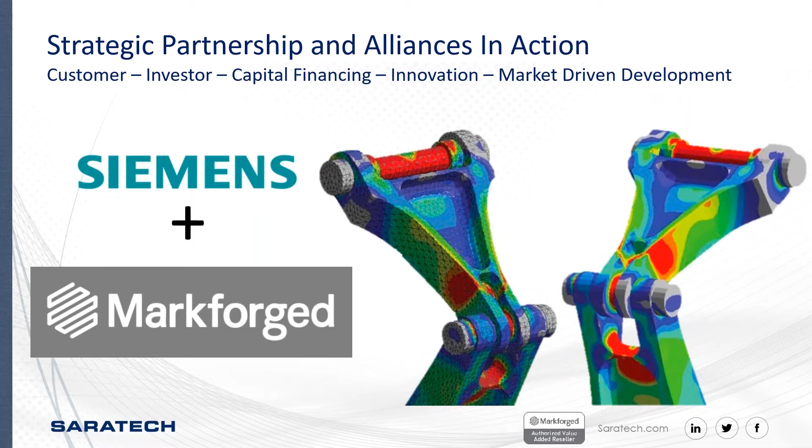So speaking of manufacturing, we are all here today for the same reason, right? To stay current about advances in technology that can make us more efficient, make our jobs easier, or provide a competitive advantage in a tough market. Manufacturing is at its core fueled by a drive for greater and greater efficiency, and it never stops changing. It's what keeps our lives interesting, but also makes it a challenge to stay competitive, and we all know that in this climate. Sometimes these changes produce incremental results. Think about increases in electric motor efficiency or sensor accuracy. But on occasion, technologies produce massive waves throughout the manufacturing landscape and fundamentally change things.

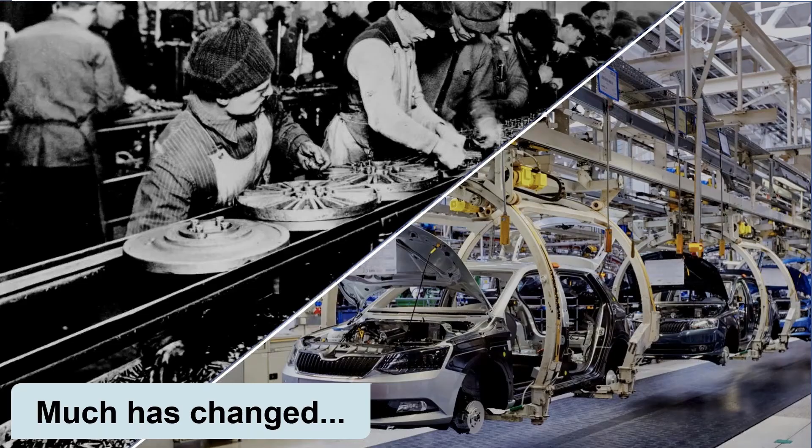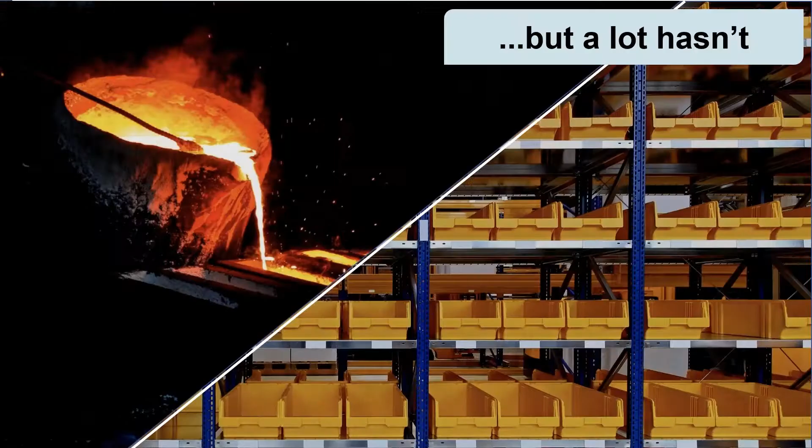So manufacturing technology has changed by leaps and bounds in the last 100, even the last 50 years. We've gone from the assembly line to lean production cells, from hand tools to CNC machine centers, and we're currently figuring out where and how automation fits in the mix. We've come a long way in the last century. But at the same time, there's a lot that hasn't changed either, right?

So we still cast metal into molds to avoid manufacturing downtime. We still have to carry extensive back libraries of tooling and replacement parts. Minimum order quantities are still high, and lead times are long, especially on low volume parts like tooling and fixtures. Tried and true manufacturing methods are reliable, but they're holding us back from greater gains in speed and efficiency.

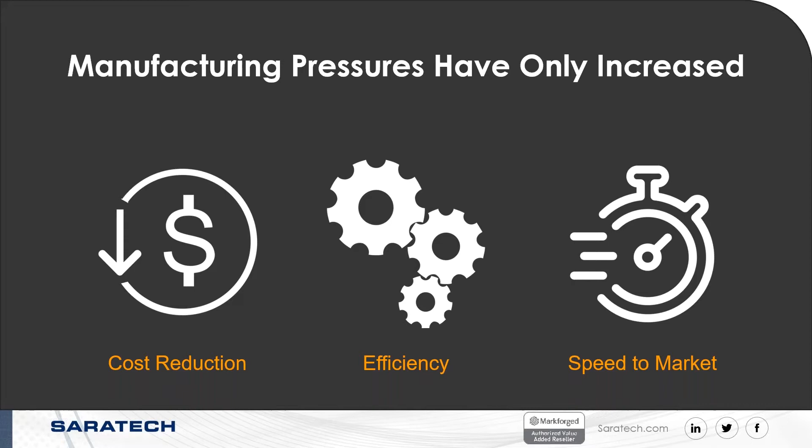One thing that's always changing are the pressures manufacturers are under to deliver. As technology improves, so do the demands of internal and external customers, leading to ever-decreasing cost goals, right? Every company is looking to cut costs and improve efficiency. And you always want to move faster and faster in bringing new products to market.

Despite 100 years of technological development, time to market is no faster for Tesla than it was for Ford. Just think about that for a second. It's been 100 years, and it still takes 5 years to build and ship a car.

Why is that? Well, first of all, cars are complicated. They're made up of thousands of parts. There's a lot of things involved in building and manufacturing a car. But our approach to producing parts hasn't changed much. There's a saying: the more things change, the more they stay the same.

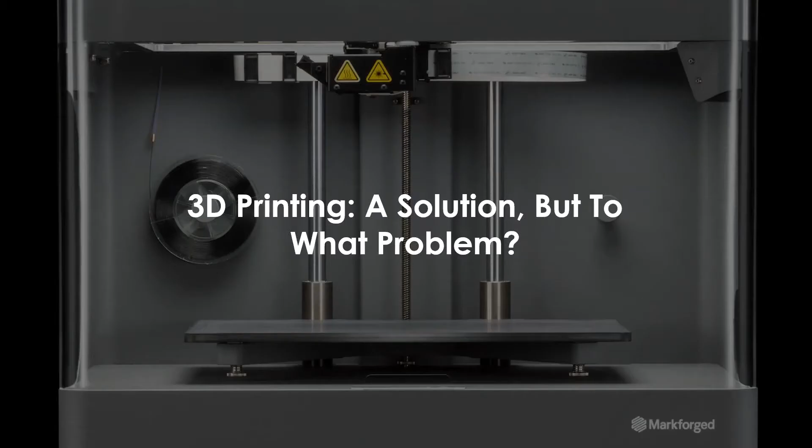But with so much technology out there, it's difficult to figure out what's right to do. What is the right technology for your business? Which brings us to the new technology we came here today to talk about: 3D printing.

There's been a lot of hype around 3D printing in the last decade, generally focused on using 3D printers in such a wide range of applications that it's become tough as a manufacturer to know where to start. Hopefully this webinar will help you toward that. What's worse, much of the hype for 3D printing has focused on pipe dream applications that are in no way achievable in the next few years.

While it's important to be aware of future technology, you're here today to learn about how you can make an impact on your business now, today. We're going to make it easy to start your journey with 3D printing and show you some of the most high impact applications to focus on when you're evaluating 3D printing for your work.

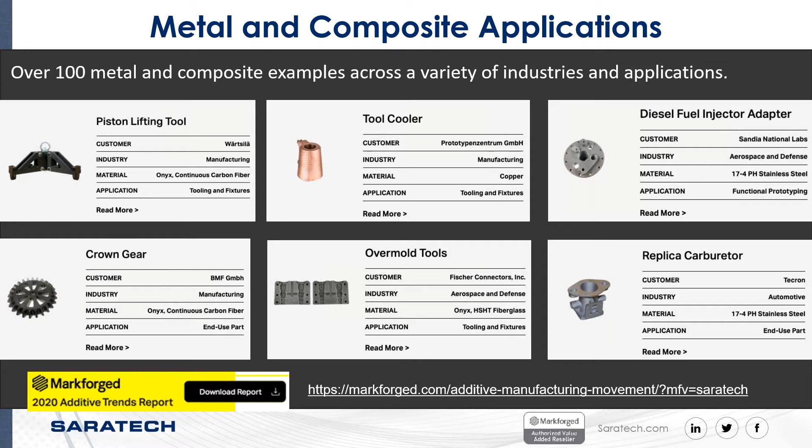We have really looked at hundreds of 3D printing cases, and it's clear that there's a strong movement towards additive manufacturing. Markforged has put together a report of these use cases. You can download them through our GoToMeeting or through a webinar following this presentation. Read the report and meet the manufacturers capitalizing on 3D printing to find out how and why companies are using this in their workflow. From automotive to aerospace to electronics to manufacturing, these modern manufacturers are already part of the movement. Each of these practical 3D applications from Markforged customers, and Saratech can help you through any hurdles with design, applications, and engineering of these product lines.

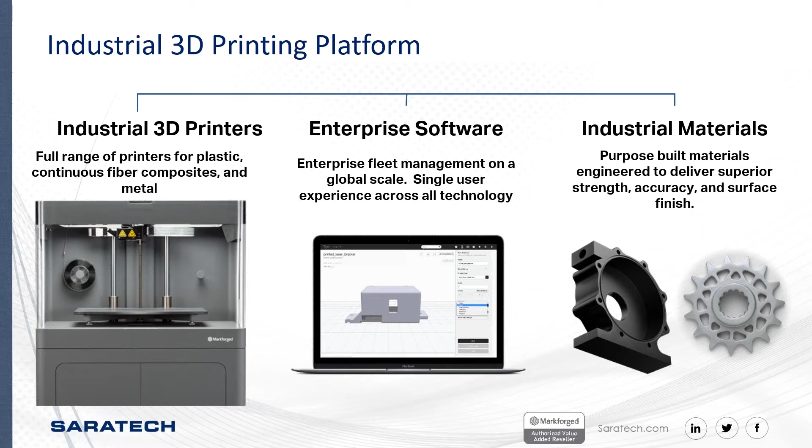Another very unique thing about Markforged is that it's one of the only companies that offers a full platform for 3D printing. What does that mean? They have various machines that we'll talk about today that allow you to print unique plastics, plastics with fiber, and metal parts. They also have an enterprise software tool that comes with the package, allowing you to be successful in placing, automating, or optimizing the print direction, print speeds, and the design that's put into this. Finally, Markforged has a list of variable materials along with fibers that can be filled through chopped form or continuous fiber, and we're going to show some of those examples as well. So it's really a one-stop shop in printing.

When we talk about a complete solution with the Markforged technology, you basically need to start with a design. You need to start with some sort of CAD file. You'll be able to upload that into their patented software called Eiger. It ties the hardware, your designs, into the ecosystem and directly communicates with the machine to allow it to

print using slicing and different configurations. Security is a top priority for Markforged, so there is only one 3D company that has achieved ISO 27001 certification, and that is Markforged. Eiger, again, is a software that allows you to upload the file, configure it, slice it, place it on the build platform, and send it to the Markforged printer.

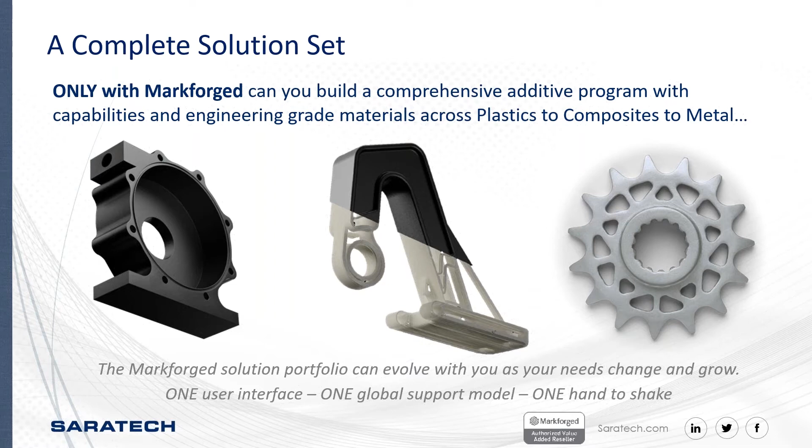One of the things that excites me is what I'll simply refer to as a hybrid product development process. As an engineer, we see a lot of tools that have always been made out of cast parts or iron or steel, very reasonably, because that's what they needed historically due to thermal temperatures or wear and tear. But what we've been successful with is a hybrid mix of polymers with or without fibers, then using inserts or a secondary metal or even polymer to interface with the gripping of a part, wear and tear on a machine, etc.

Some of the plastics that Markforged supports include Onyx, which is a blend of nylon and chopped fibers — could be carbon, could be other fibers. They have a nylon, and finally they have some vehicle and interior polymers on the Onyx side that help with UV and other environmental conditions.

On the fiber side, carbon fiber is available. Kevlar is also a very popular choice. On the lower cost scale, fiberglass and high strength fiberglass offer a lot of economical value to your printing process.

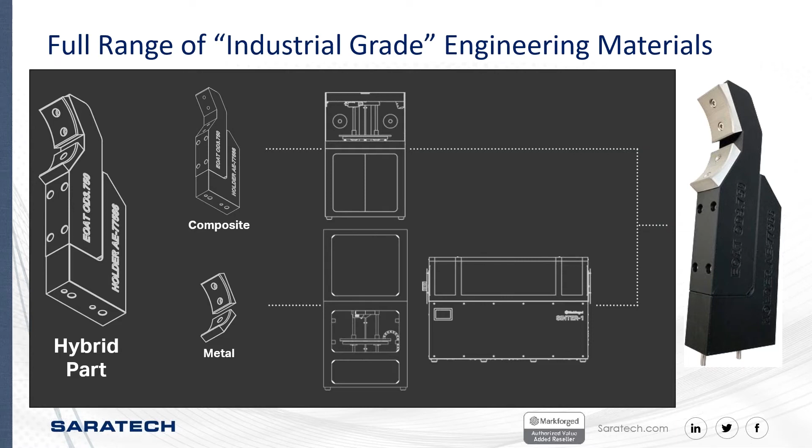In case you're not familiar with the Markforged composite printing process, basically we're using a continuous filament fabrication process to lay down continuous strands of fiber throughout the part. This gives you high strength composite effects once it's mixed with the Onyx, and allows you to achieve material properties through stress, strain, and ultimate values on the level of aluminum 6061.

To take advantage of this process, you'll still want to design your part in CAD using traditional methods. You can use topology optimization, and you should absolutely look at part reduction capabilities. So you don't want to just print the part that you've always constructed. Let's, if possible, look at the design process and use some new, modern benefits that help you and your company.

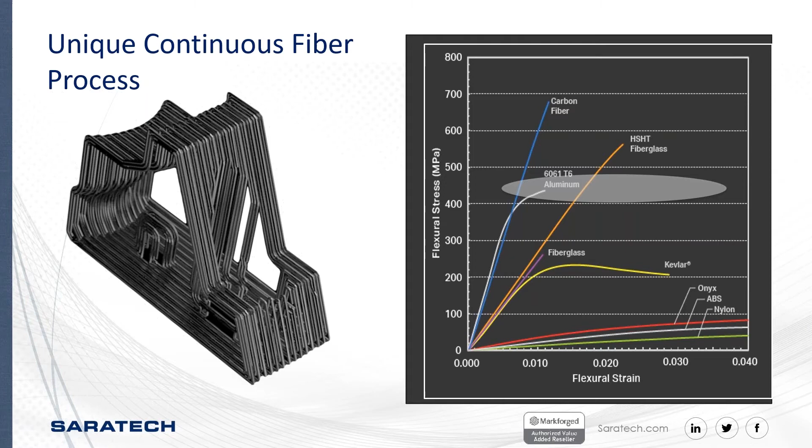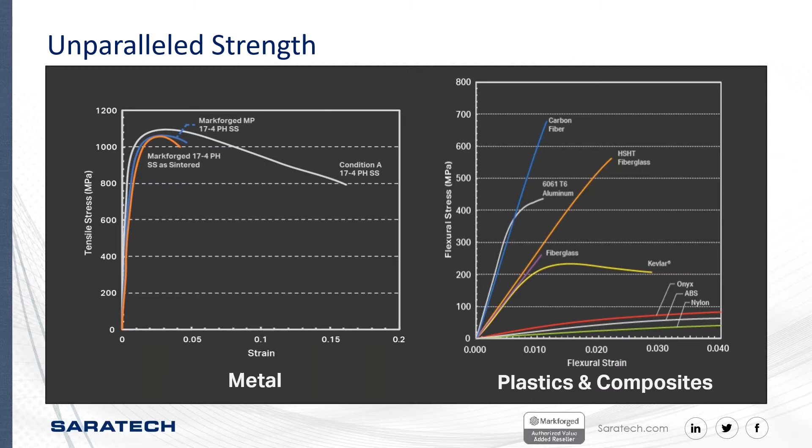You can learn and utilize Markforged machines with both metal and composites by downloading the design guide. It's available to you on the Markforged website, also the Saratech website. The design guide is a great way to look at and determine how your existing part could be modified to better support the printing process. The guide was developed to provide comprehensive foundations, and finally our team and the Markforged team are here to help with part identification and any questions you may have to get to the next level.

Let's use this in the form of a case study. So Stanley Infrastructure — I think we're all aware of Stanley with regards to home tools, drills, saws — but their industrial division is a very heavy industry tool manufacturer, and they build a handheld hydraulic tool that can be handheld or mounted to heavy equipment, used to put in posts or signage or other things.

So Stanley's infrastructure to build handheld products is a very important characteristic. Their business is making tools that are expected to last and support for decades, but there are also lower-level volumes of hundreds of replacement parts per year. So whether it's an initial allotment or a replacement part, there are always ways to improve, bring down costs, and impact customer satisfaction.

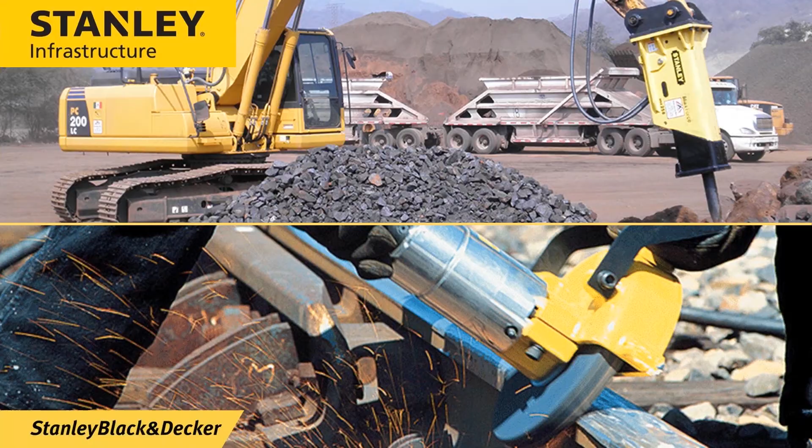With this case example, we're looking at the PD45 post driver. Stanley is consistently looking to innovate and improve their process, so they worked with Markforged to help develop a more economical solution for building replacement parts for this hydraulic post driver. This device is used for driving road signs into the ground and experiences a lot of vibration and shock.

A part of this driver also tends to fail simply because of the traditional and earlier design process. The part was cast. It was a multi-piece component with an exterior sleeve that was bolted, and internal mechanisms of bearings that helped activate the trigger and apply pressure in a timely manner. Because this component was multiple parts, and due to the environment, these things could separate slightly. There could be leaking, and eventually breakdown from wear and tear due to being a multi-part component.

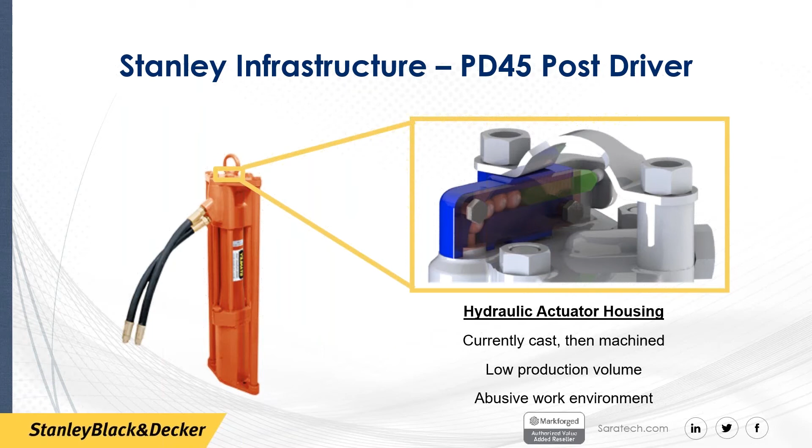Customers come to us quite a bit because they have experience, they have testing, they have all these parts they've made successfully for years, and they'll ask, can we print this? The answer is yes, probably. There may be some slight changes, but if your traditional methods have been successful for so many years, it may not make financial sense to print it.

So what we like to do is ask the question: is there room for improvement? With this part that's been in existence, is it possible to remove mass? Is it better to reduce the number of components, hence reducing the risk of leakage or failure, or the amount of physical labor to assemble during production, but also to fix or replace while in the field?

So Stanley redesigned this part with the assembly optimized for 3D printing using Markforged technology, taking it from an assembled 4 parts to a single part. You'll notice they changed the hole pattern from a circle to a hexagon. This allowed them to avoid using supports and avoid some post-processing, making the costs even more attractive for switching to a 3D printed part.

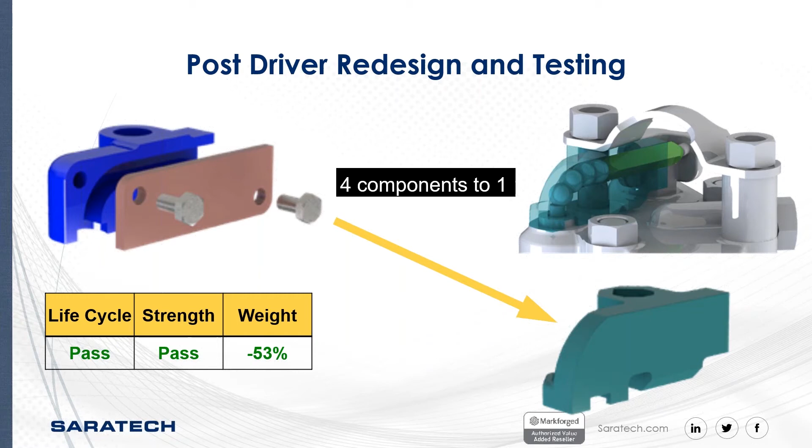Stanley's life cycle testing includes a robot which activates the switch for hundreds of cycles, and the 3D printed part passed with flying colors. I think this metric is absolutely impressive.

So on production runs, at the beginning of this product cycle, we're printing hundreds of these things. We're able to reduce the part cost by over 42%, and we're able to get this to market 75% faster than the traditional methods.

You can imagine with casting a part, it's going to take time for tooling, it's going to take time for shipping. Casting the parts, finishing the parts, assembling the parts all takes time. So with these parts coming off as one monolithic structure, you're definitely impacting the cost and the lead time.

If we look at this with regards to service and replacement, it's even more impressive. Instead of having hundreds of these things in bins that we have to ship out to a field when it breaks, we should be able to provide the construction company, Stanley, or service providers with these drawings and part files so they can print these parts on demand.

I believe this part printed in less than 9 hours. So if a part breaks and there's a service call, we should be able to have a finished part the next day on the field being installed, impacting that installation of signage and posts.

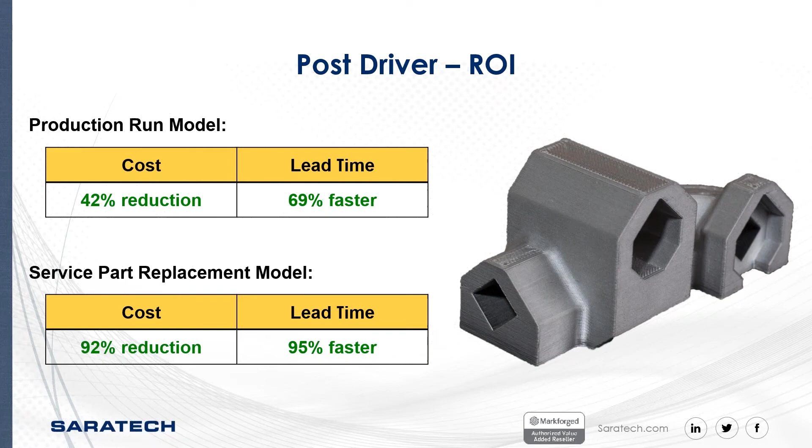Great, thanks. Thanks, Terrence, for that example.

So we've shown you how 3D printing is changing manufacturing, right? The technology behind Markforged 3D printing stands as a success story. But when you go back to work after today's presentation, you might be wondering how 3D printing could help you. On the survey earlier, quite a few of you said that you use 3D printing today, but you're not sure you're getting the most out of it. So let's show you how to find good applications around your business.

There are 3 main perspectives to look at your operation for 3D printing applications. First is economic and cost-based drivers. Second is common manufacturing applications that continue to resurface at plant after plant. And third, you can look at common materials often used in tooling and fixtures. We're going to go over those things.

So let's start with the economic drivers. When it comes to actually reducing these costs, some of the biggest opportunities we see are in reducing unplanned downtime. No one wants that, right? Unplanned downtime, making it more efficient to change over a manufacturing line, and reducing the cost and efforts of upgrading existing machinery with new sensors and safety equipment.

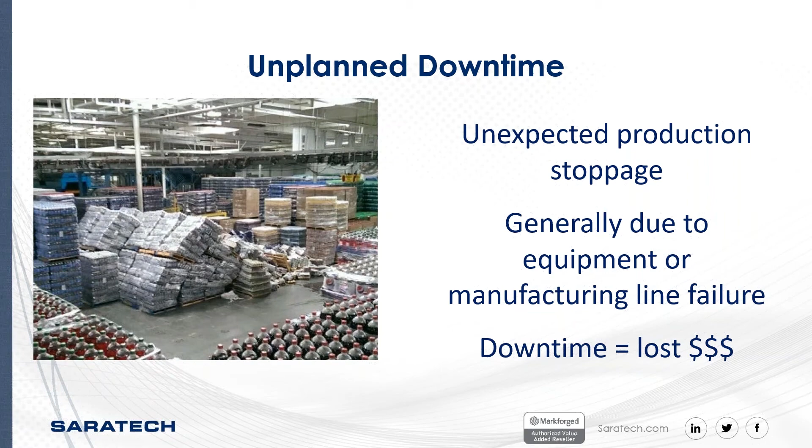So 3D printing allows you to make replacement parts quickly and more cost effectively, as a prime example with the Stanley case that Terrence just talked about earlier.

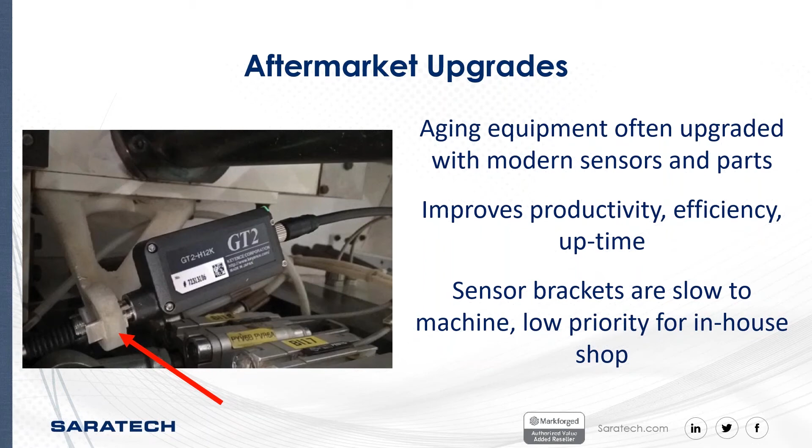There's often a lot of opportunity to print components which upgrade or repair aging machinery. These could be brackets and mounts for sensors which monitor your processes and improve your yield and efficiency. And they can also be parts to mount modern safety equipment and keep older machines compliant with modern regulations, as you can see where the red arrow is pointing right now, that's a mount for that sensor.

And finally, a really common phenomenon we see in manufacturing plants is something I like to call cardboard or duct tape engineering. These are generally some sort of temporary fix that wasn't documented and was put in place to hit an upcoming production deadline, but never got replaced with a permanent solution. It's funny how a temporary fix most oftentimes becomes a permanent solution, isn't it?

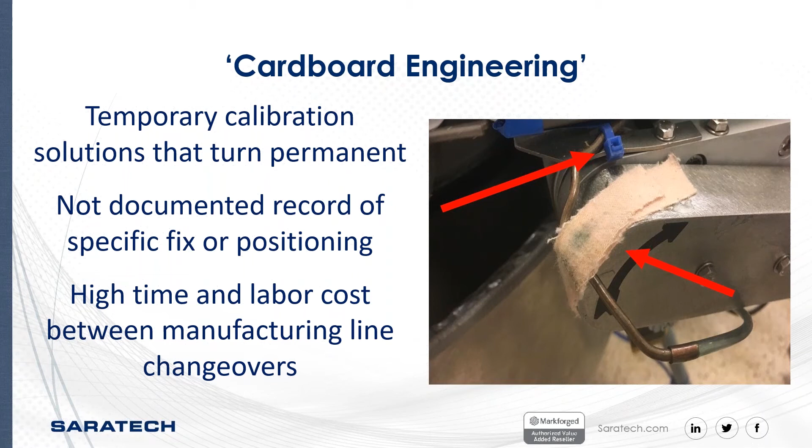So with 3D printing, you now have a better way to do this.

Despite vast differences in types of products being made, we find a ton of applications that are common across manufacturing fields, whether you're making tractors or night vision goggles. So let's talk about some of those.

I'm going to send the presentation back to Terrence to talk about a couple more case studies that may help give you some insight. So the first case study is about end of arm tooling. Terrence? Yes, thank you, Andy.

I appreciate that. These case studies are available on our go-to site that you'll see. It's also available on our website, so please feel free to dive into a lot more detail than I'm going to cover, simply because of the time constraint that we have.

The Dixon Valve Company is a 100-year-old manufacturer of hose couplings and fluid transfer accessories. They worked with Markforged on reviewing some of their parts and trying to find the best solutions to add the technology in an ROI situation.

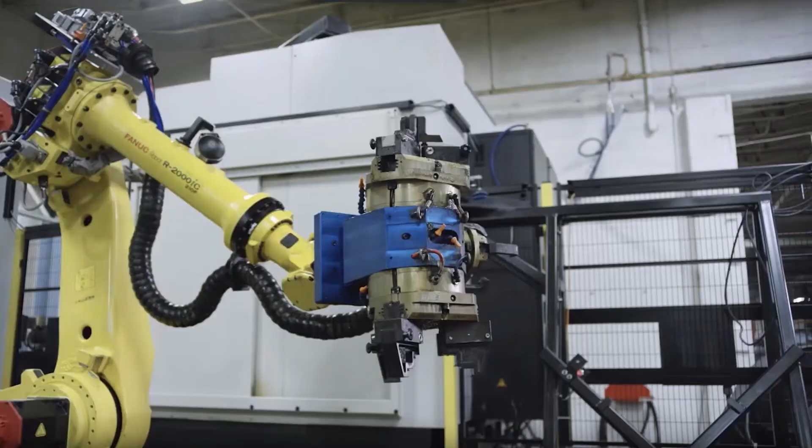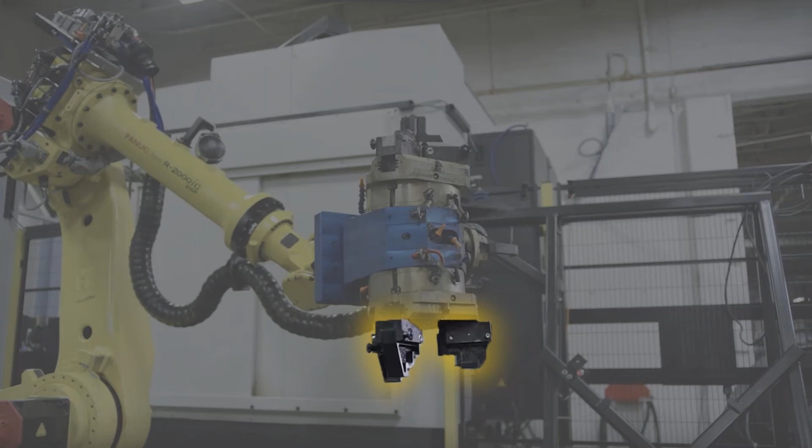In this example, you will see that they came up with printed custom fingers that were inserted at the end of the arms for robotic cells. The end of the arm tooling was a perfect application for 3D printing. It allowed for some creativity, included some unique shapes to allow for installation, and finally was very successful in being able to grip and perform the tasks it was intended for in some low volume production situations. So this was perfectly suited for Markforged and the 3D printing process.

When you look at the metrics, being able to decrease time and save costs are things that help impact the ROI. Dixon was very impressed with the ability to, instead of taking a month, in less than a week, be able to put and install these things and get things back up and running, not only for them, but also for their customer base. Finally, the cost savings over the CNC process and raw materials: when you look at all the advantages of additive manufacturing, the Markforged technology saved them about 82%, and obviously paid for a machine in pretty record time, almost a month and a half.

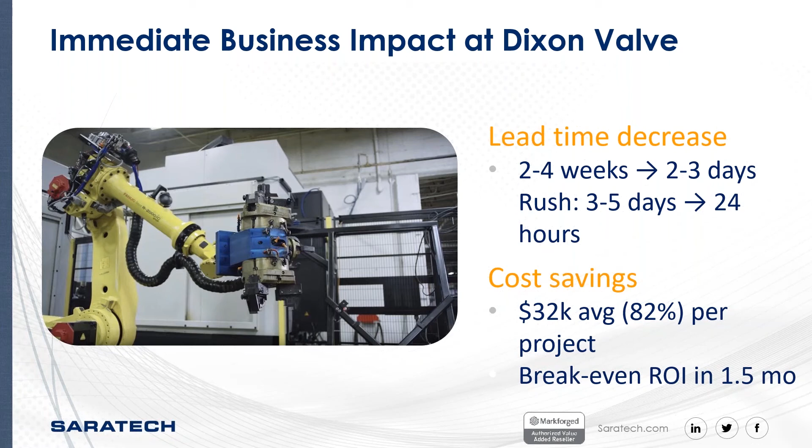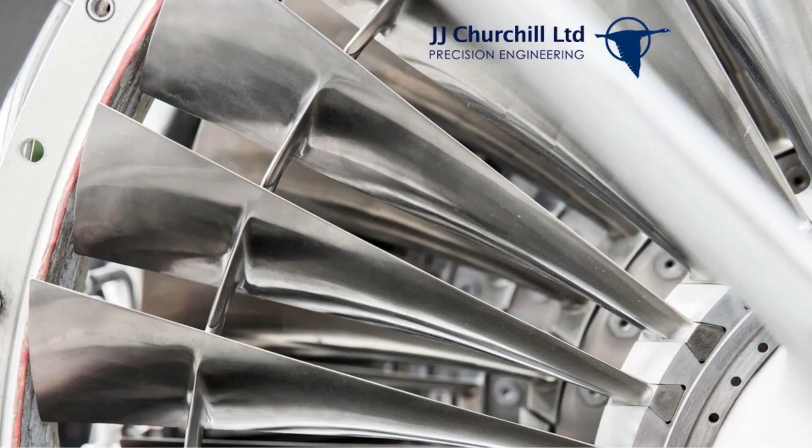The next and final case study is with regards to CMM nests. Again, just want to give you some visual products to show you how the Markforged technology can impact this.

J.J. Churchill is a long-standing leader in precision aerospace manufacturing. They produce turbine blades for a range of OEMs. The turbine blades take a long time to manufacture due to the extensive process, and to maintain their market leadership, they're always looking at innovative engineering, design, software, or manufacturing methods to impact tooling.

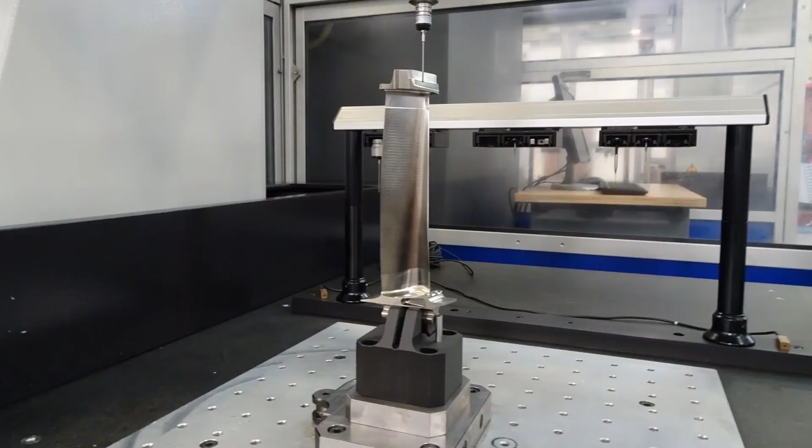Here you see inside one of their chambers, they meticulously inspect every single turbine blade to make sure that the CMM values ensure safety and quality. The blades are held in place in this fixture and device and need to be repeatedly located to allow for measurement without damage.

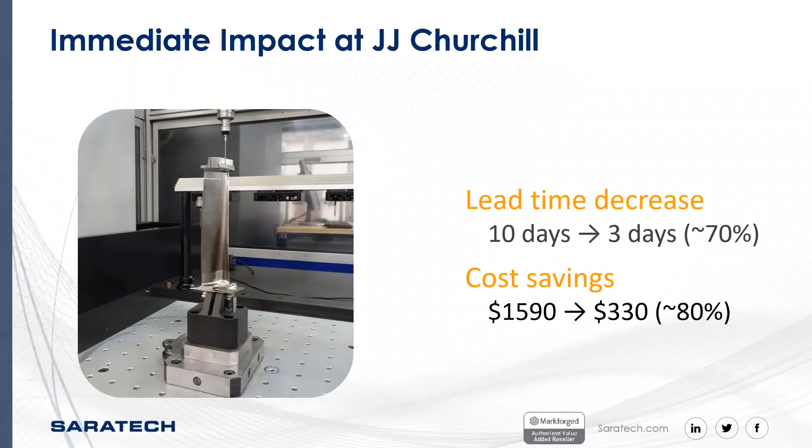You can see in this image that these printed parts conform to the geometry of the root of the turbine blade. Each one may have a different pitch or yaw, and 3D printing is obviously an attractive ability to go after that. JJ Churchill found they were able to decrease their lead time from traditional methods from 10 days down to 3 days, and have a drastic impact in cost, labor and materials by decreasing it by almost 80%.

Fantastic, thank you for those case studies, Terrence. As you can see, there's tremendous savings in time and money when 3D printing applications are employed the right way in your organization. So the third and final way to search for ways to save with 3D printing is the most general way, that's to look for applications based on the type of materials that are being used in-house today. Specifically, we're going to look for materials often used in tooling and fixturing applications.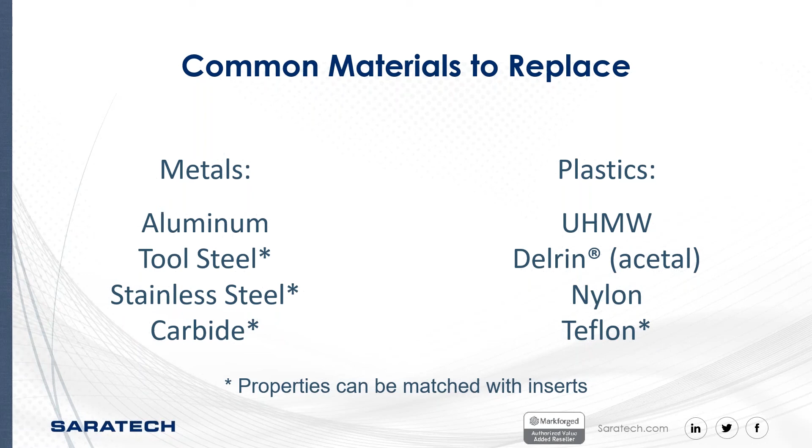So as you've seen, we generally see that Markforged can replace parts traditionally made from both common engineering metals and plastic. Materials marked with an asterisk here are materials which can often be replaced by a 3D printed part that incorporates off-the-shelf inserts made from the material in question. This isn't always the case, but many times an application demands the specific material property of one of these materials in a surface region alone, while the rest of the part can be composed of a different material. These applications are naturally suited for 3D printing because you can easily design and print a geometry which incorporates an off-the-shelf part for far lower cost than traditionally manufacturing the original part.

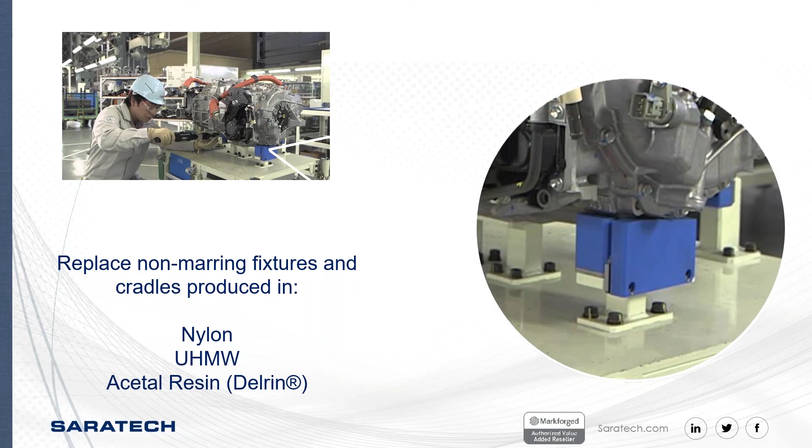So we talked about manufacturing innovation, Markforged 3D printing technologies and applications. Terrence showed you 3 case studies of customers benefiting from 3D printing technology. Think about how you will use 3D printing in your business.